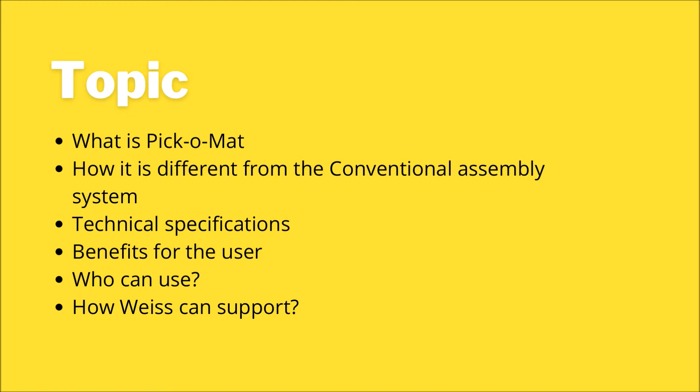The Pick-o-Mat assembly machine combines a rotary indexing table and a centralized cylindrical cam unit. This unit is connected to three different modules: lifting modules, handling modules, and pressing modules. These modules together create an advanced and high-speed solution for those looking to optimize their assembly line with very low maintenance and high production volumes.

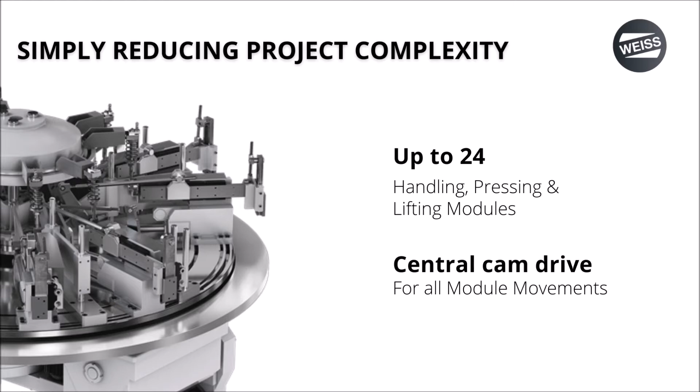Let me take you through the product specifications in detail. The Pick-o-Mat is in a class of its own. This automated assembly system combines a fixed stationary rotary indexing table with a maximum combination of 24 modules - handling, lifting and pressing - which are driven with a central driven shaft. Various strokes can thus be combined. Therefore, what the customer gets in return is a powerful, cost-effective, and easy to integrate complete solution for their assembly applications.

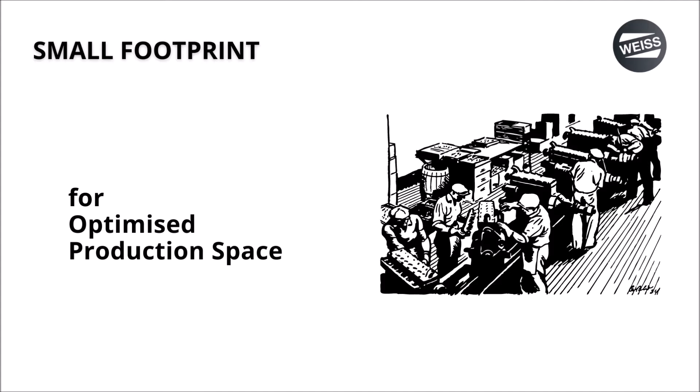Now, the question is why a Pick-o-Mat and how it is different from conventional assembly systems. To answer this, we need to ask ourselves how effectively we are utilizing the space on our shop floors with respect to the machine footprint. Choosing between a conventional assembly system or a Pick-o-Mat for automated assembly applications also depends primarily on space availability on the shop floor. With Pick-o-Mat, you can assemble a lot of products in a relatively small footprint.

Let's take an example of two shop floors. On your left is shop floor 1 and on your right is shop floor 2, with the same production area. Let's assume shop floor 1 has conventional assembly systems installed which allows space for only 3 conventional systems, whereas shop floor 2 has installed up to 9 Pick-o-Mats with a lesser footprint, utilizing the same area. With this installation, shop floor 2 is able to increase production capacity in the same working space.

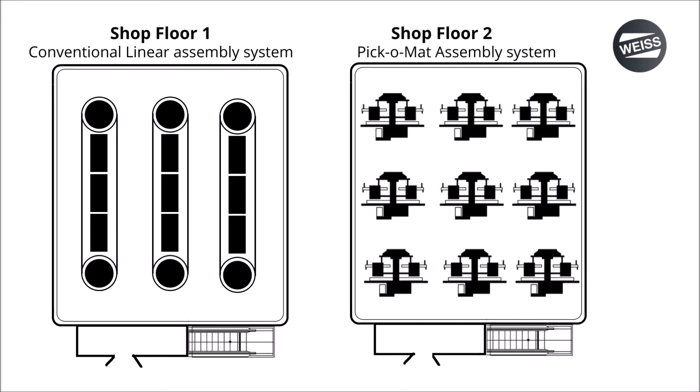Not only that, you will have many benefits you can achieve through the Pick-o-Mat, such as reduced downtime because of our 100% maintenance-free indexers. Our indexers are pre-filled with synthetic lubricants. In addition, they are sealed with O-rings to prevent leakage during operation.

Plus, the indexer's solid roller cam follower technology increases load capacity and shock resistance for e-stops and machine overloads. With more than 50 years of proven indexer technology, our solution provides the highest precision and accuracy, hence seamless high-speed production is achieved without hassle.

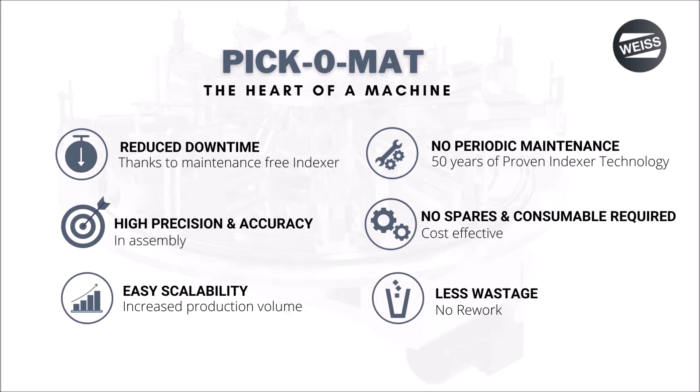The system doesn't require any consumables or spares, which makes our system directly cost effective. Apart from that, the system can be easily scaled to serve high-speed assembly applications with minimum wastage or rework during assembly.

With Pick-o-Mat, many peripherals can be integrated, such as rotary bowl feeders, input-output infeeds or conveyors, end-of-arm tooling, etc., which makes the Pick-o-Mat the heart of a machine.

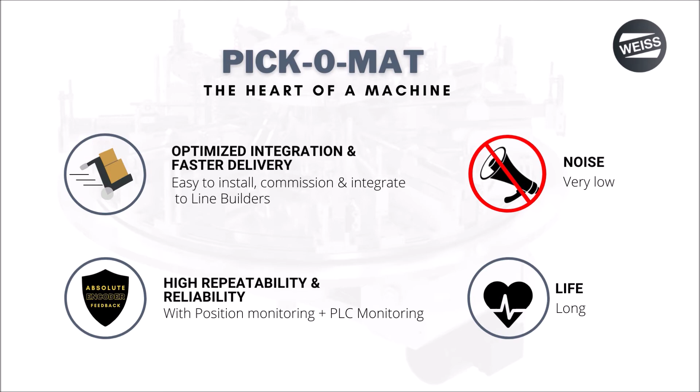Weiss recognized that nowadays the market requires quick delivery, installation, and commissioning of high-speed assembly systems. So, we are equipped to deliver pre-configured proven assembly solutions. Not only that, Weiss partners like system integrators, line builders, SPM, and machine builders can sync the application requirements with the peripherals along with the Pick-o-Mat and supply proven technology which is reliable and efficient for high speed production lines.

Now coming on to the technical specifications. What features of Pick-o-Mat make it a special assembly machine?

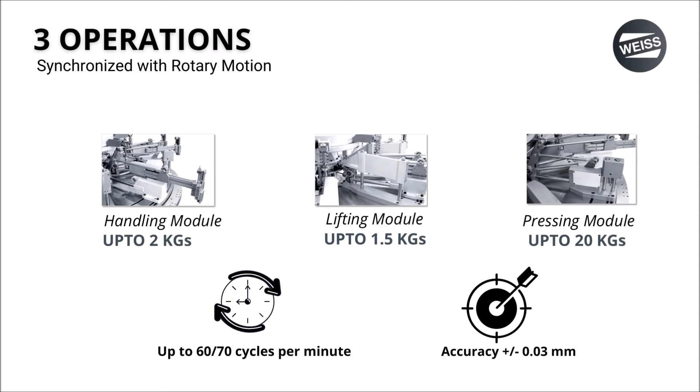As you can see on the screen, Pick-o-Mat can be built with a combination of a maximum of 24 modules of handling, lifting and pressing, where the payload of handling modules is up to 2 kg with different strokes and sizes, lifting modules up to 1.5 kg, and pressing modules available up to 20 kg of pressing force.

As far as cycles per minute are concerned, Pick-o-Mat can achieve up to 60 to 70 cycles per minute depending on the configuration. The accuracy of plus minus 0.03 mm is the best performance in its class.

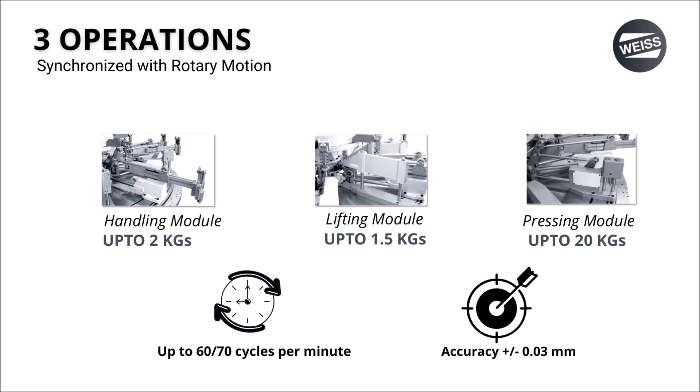Now, let's look at the benefits for our customers. Increased product volume with automation is not the only benefit of the high-speed assembly system, but it significantly reduces your burden when it comes to the cost of workforce. It also helps increase capacity, efficiency, and reliability, and optimize the investment cycles to fuel your growth.

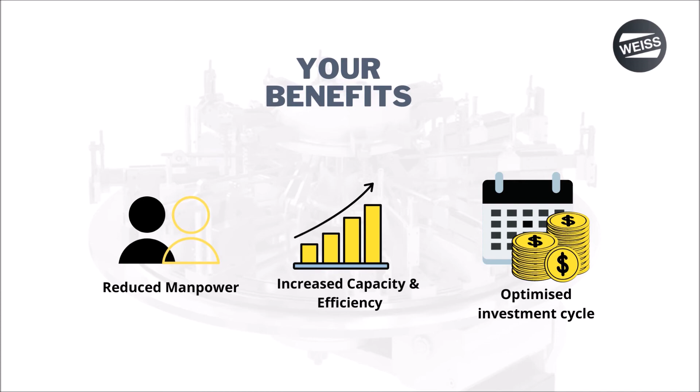Now, when it comes to applications, the possibilities are diverse. Whether it is automotive, electronics, medical, or SPM machines and suppliers, our Picomat has proven its technology globally. The segments you are looking at on the screen are just the tip of the iceberg - plenty of applications can be offered to our customers.

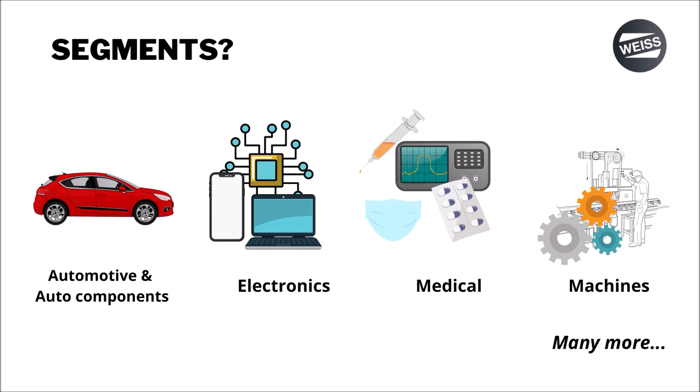Now, let's talk about our package. Not only the Picomat module, WEISS can offer a complete package which is powerful, cost efficient, and easy to integrate. In this package, we combine Picomat with customer specific dial plates, base frames, along with base plate and the complete control system. This is one of the top solutions for advanced assembly systems.